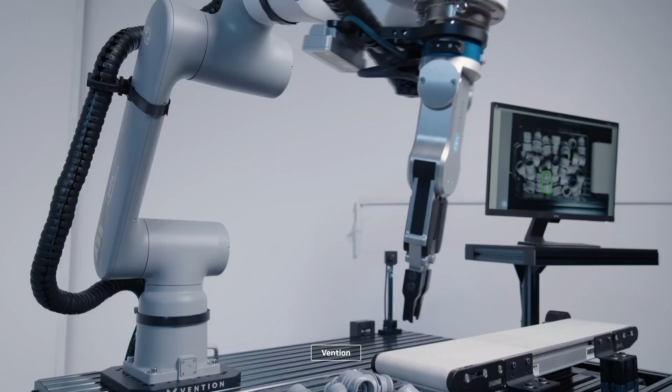Everything that moves will be autonomous. Physical AI will embody robots of every kind, in every industry. 3 computers built by NVIDIA enable a continuous loop of robot AI simulation, training, testing, and real-world experience.

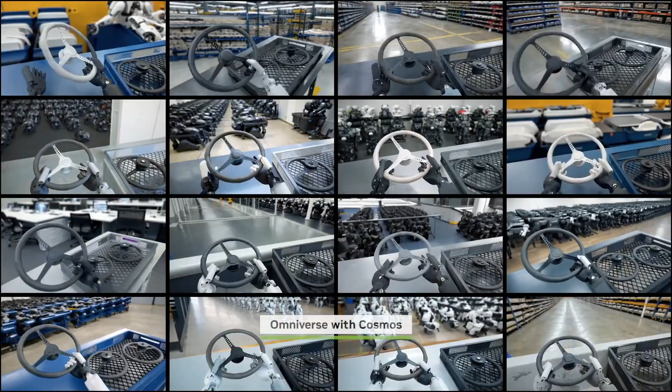Training robots requires huge volumes of data. Internet-scale data provides common sense and reasoning, but robots need action and control data, which is expensive to capture. With blueprints built on NVIDIA Omniverse and Cosmos, developers can generate massive amounts of diverse, synthetic data for training robot policies.

First, in Omniverse, developers aggregate real-world sensor or demonstration data according to their different domains, robots, and tasks. Then use Omniverse to condition Cosmos, multiplying the original captures into large volumes of photoreal, diverse data.

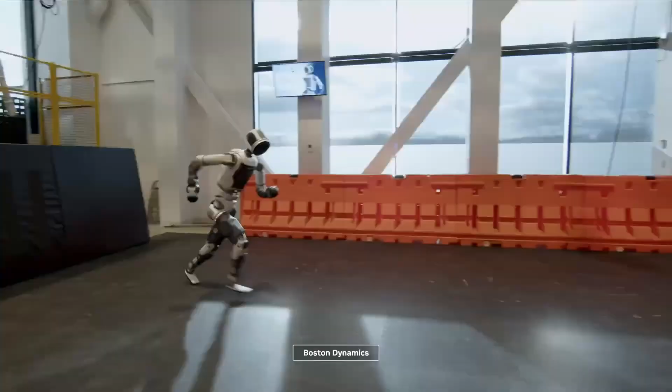Developers use Isaac Lab to post-train the robot policies with the augmented dataset, and let the robots learn new skills by cloning behaviors through imitation learning, or through trial and error, with reinforcement learning AI feedback.

Practicing in a lab is different than the real world. New policies need to be field tested. Developers use Omniverse for software and hardware-in-the-loop testing, simulating the policies in a digital twin with real-world environmental dynamics, with domain randomization, physics feedback, and high-fidelity sensor simulation.

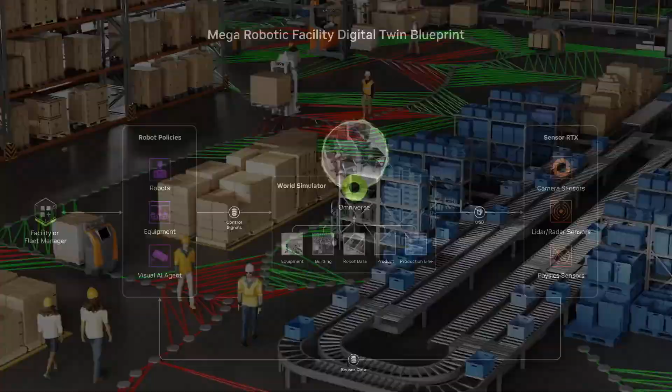Real-world operations require multiple robots to work together. Mega, an Omniverse blueprint, lets developers test fleets of post-trained policies at scale. Here, Foxconn tests heterogeneous robots in a virtual NVIDIA Blackwell production facility.

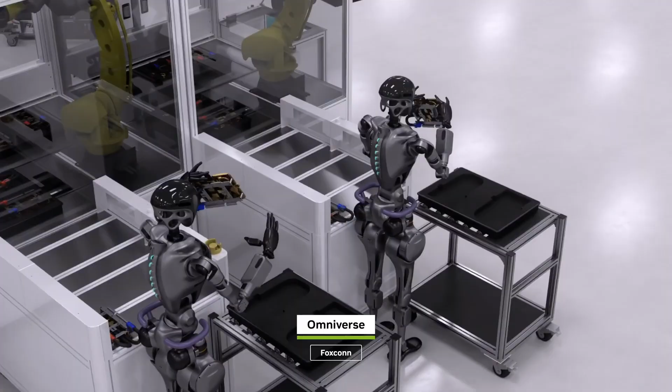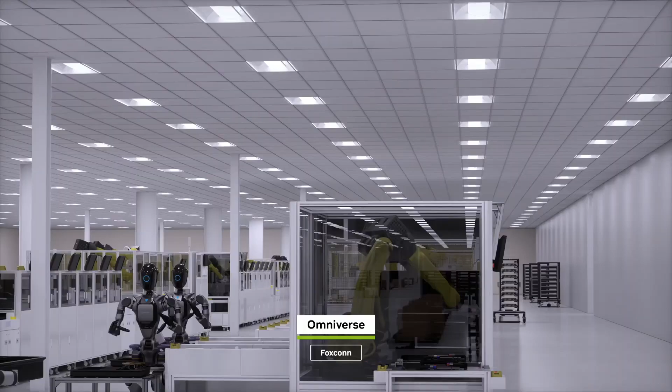As the robot brains execute their missions, they perceive the results of their actions through sensor simulation, then plan their next action. Mega lets developers test many robot policies, enabling the robots to work as a system, whether for spatial reasoning, navigation, mobility, or dexterity.

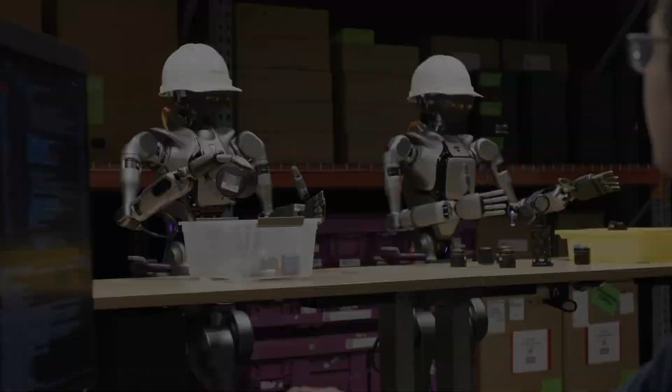Amazing things are born in simulation. Today, we're introducing NVIDIA Isaac GR00T N1. GR00T N1 is a generalist foundation model for humanoid robots. It's built on the foundations of synthetic data generation and learning in simulation.

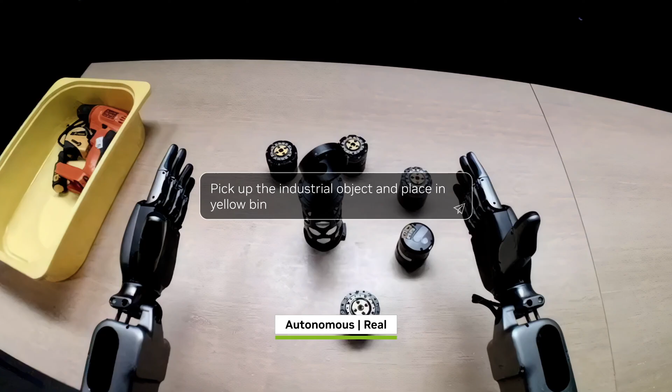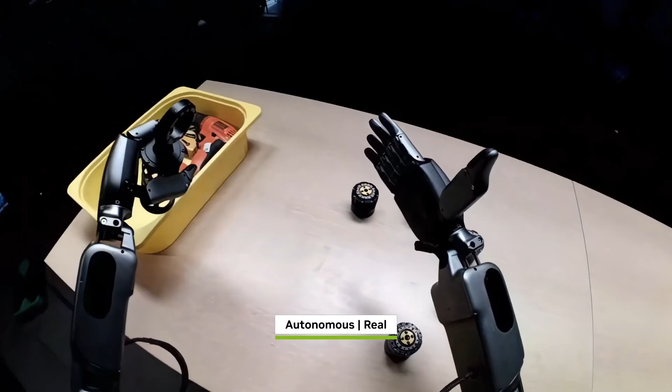GR00T N1 features a dual system architecture for thinking fast and slow, inspired by principles of human cognitive processing. The slow thinking system lets the robot perceive and reason about its environment and instructions, and plan the right actions to take. The fast thinking system translates the plan into precise and continuous robot actions.

GR00T N1's generalization lets robots manipulate common objects with ease and execute multi-step sequences collaboratively. And with this entire pipeline of synthetic data generation and robot learning, humanoid robot developers can post-train GR00T N1 across multiple embodiments and tasks across many environments.

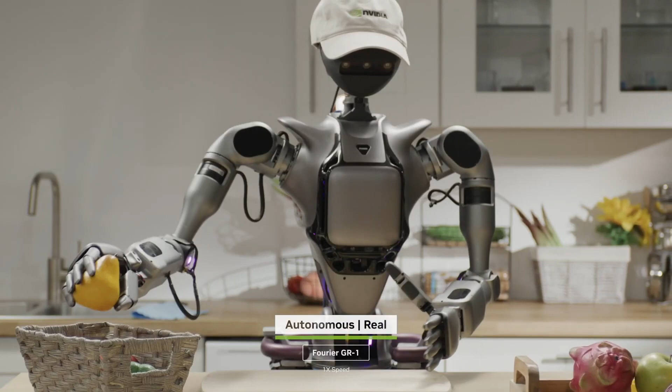Around the world, in every industry, developers are using NVIDIA's 3 computers to build the next generation of embodied AI.

Physical AI and robotics are moving so fast. Everybody pay attention to this space. This could very well likely be the largest industry of all.

At its core, we have the same challenges. As I mentioned before, there are 3 that we focus on. They are rather systematic. One, how do you solve the data problem? How, where do you create the data necessary to train the AI? Two, what's the model architecture? And then three, what's the scaling laws? How can we scale either the data, the compute, or both, so that we can make AIs smarter and smarter and smarter? How do we scale?

And those fundamental problems exist in robotics as well. In robotics, we created a system called Omniverse. It's our operating system for physical AIs. You've heard me talk about Omniverse for a long time. We added 2 technologies to it. Today I'm going to show you 2 things.

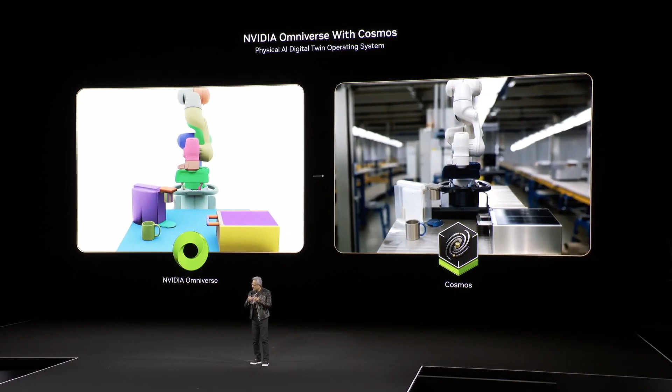One of them is so that we could scale AI with generative capabilities, a generative model that understands the physical world. We call it Cosmos. Using Omniverse to condition Cosmos, and using Cosmos to generate an infinite number of environments allows us to create data that is grounded, controlled by us, and yet be systematically infinite at the same time.

So you see Omniverse, we used candy colors to give you an example of us controlling the robot in the scenario perfectly, and yet Cosmos can create all these virtual environments.

The second thing, just as we were talking about earlier, one of the incredible scaling capabilities of language models today is reinforcement learning with verifiable rewards. The question is, what's the verifiable reward in robotics? And as we know very well, it's the laws of physics.

Verifiable physics rewards. And so we need an incredible physics engine. Most physics engines have been designed for a variety of reasons — for large machineries, or maybe for virtual worlds, video games and such. But we need a physics engine designed for very fine-grained rigid and soft bodies, designed for training tactile feedback, fine motor skills, and actuator controls. We need it to be GPU accelerated so that these virtual worlds could live in super linear time, super real time, and train these AI models incredibly fast.

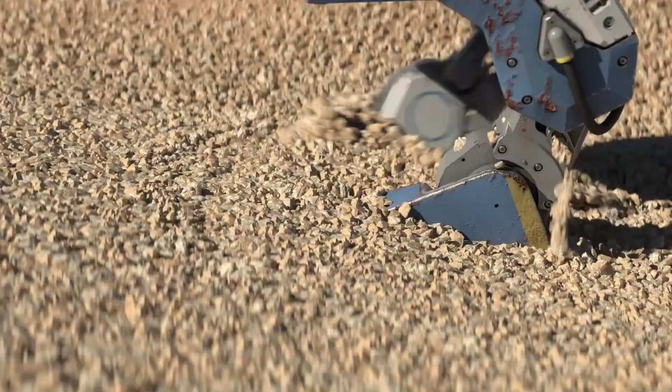Thank you. All right, let's start that over, shall we? Let's not ruin it for them. Hang on a second, somebody talk to me. I need feedback, what happened? I just need a human to talk to. Come on, that's a good joke. Give me a human to talk to. Janine, I know it's not your fault, but talk to me. We just got two minutes left. I'm right here, they're re-racking it. They're re-racking it? I don't even know what that means. Okay.

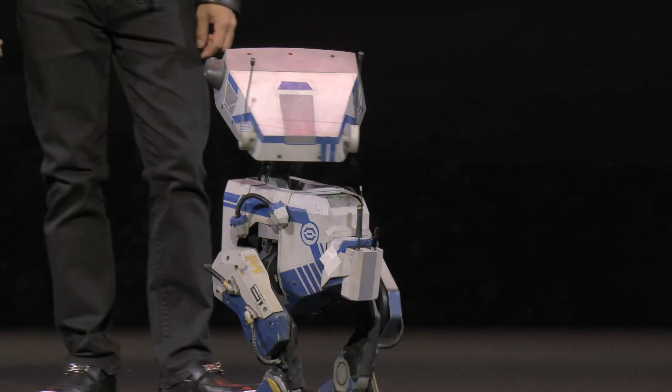Tell me that wasn't amazing. Hey, Blue, how are you doing? How do you like your new physics engine? You like it, huh? Yeah, I bet. I know — tactile feedback, rigid body, soft body simulation, super real time. Can you imagine just now what you were looking at is complete real-time simulation? This is how we're going to train robots in the future. Just so you know, Blue has two computers, two NVIDIA computers inside. Look how smart you are. Yes, you're smart. Okay, all right.

Hey Blue, listen, how about let's take them home? Let's finish this keynote, it's lunchtime. Are you ready? Let's finish it up. We have another announcement. You're good, you're good, just stand right here. Stand right here, stand right here. All right, good, right there. That's good, all right, stand.

Okay, we have another amazing news. I told you the progress of our robotics has been making enormous progress. And today we're announcing that Groot N1 is open sourced.